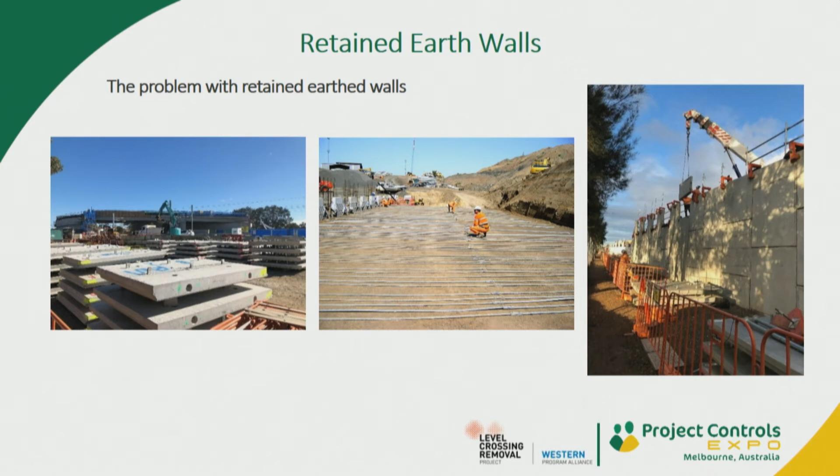You have to run a course of panels. This will all make a lot more sense in a little bit. You run the panels, then the fill and the straps, and work your way up. You can't install panels without straps and fill, and you can't install straps and fill without panels coming in. It's quite a sequential flow.

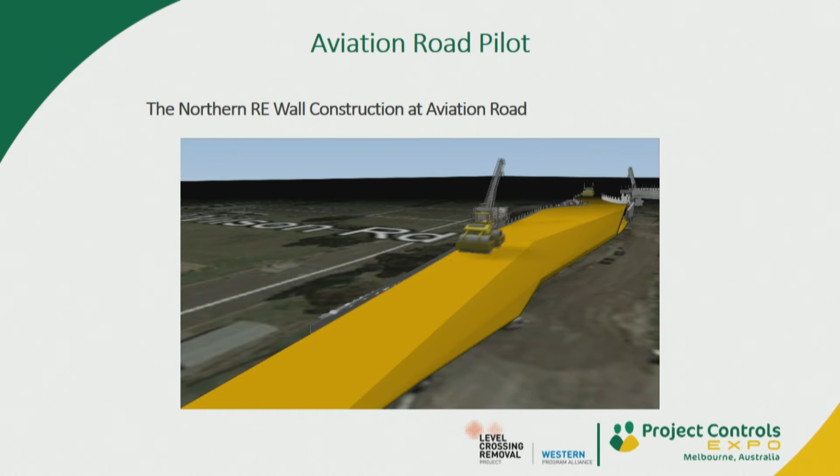This is a 4D animation of the walls that we built at Aviation Road, the trial site. That demonstrates how they go together. It doesn't show the straps.

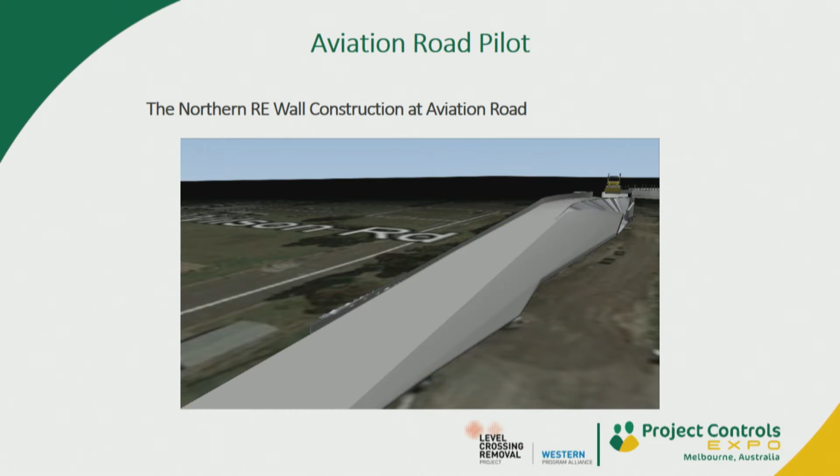That's one of the walls. And I'm handing over.

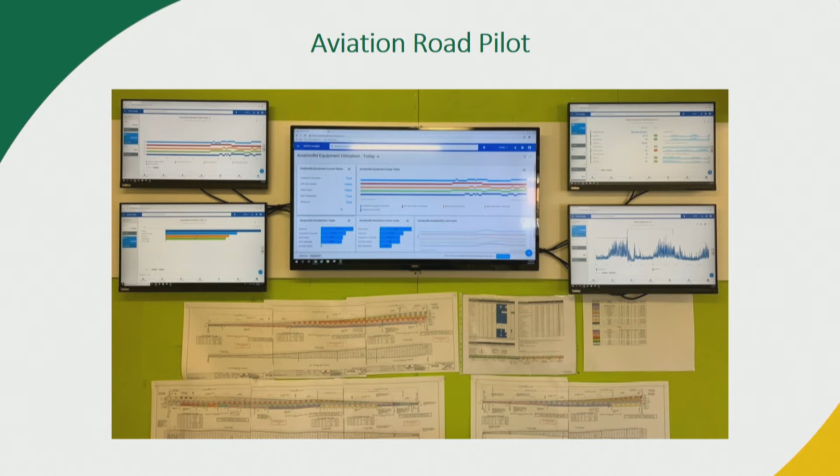So this is actually in the planning area, out on site. This is where they would do their daily stand-ups, as well as usually their weekly construction meetings to discuss what they're doing for the next few days, as well as the next few weeks. So these visuals were put together to allow our people to actually make informed decisions and proactive decisions.

So once we got all this technology up and working, we were able to prove that the concept actually worked, rapidly deployable, that sort of thing. We decided to switch focus. We had about 6 weeks left of the pilot, and then we also had about 6 weeks left of RE wall construction. So we decided to concentrate on that activity.

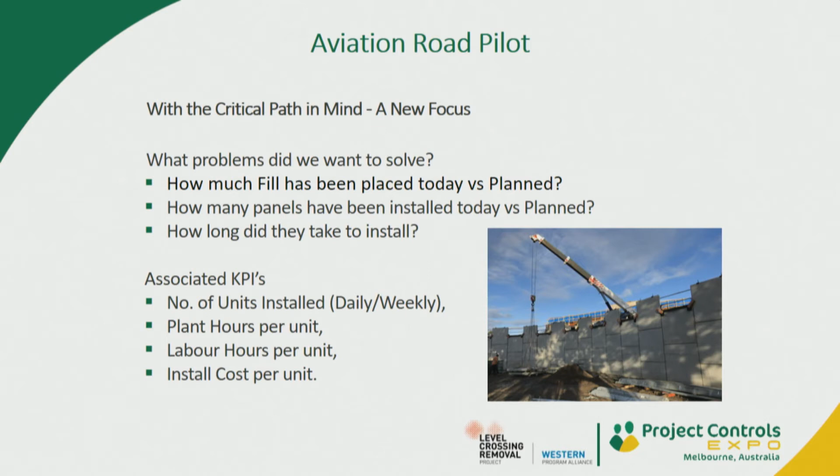So going back to the whole premise of connected sites being user-led, we started with those questions. What did our people need to see in order to make informed decisions? What was the burning platform? So those questions were like, how much fill have I placed for the day compared to what was planned? How many panels have I installed today compared to planned? And then how long did it take for me to install those panels?

So that all goes towards your critical path activity. And if you can influence your critical path, I don't need to tell you the savings involved with that. And additionally to that, LXRP have some pretty key KPIs as part of most activities that we're trying to measure, or part of our continuous improvement as part of the program.

So some of these KPIs can include the number of units we've installed per day as well as per week, the amount of plant that we've used and the hours associated to actually install that, the labour that we've used to install that, and all that goes towards cost.

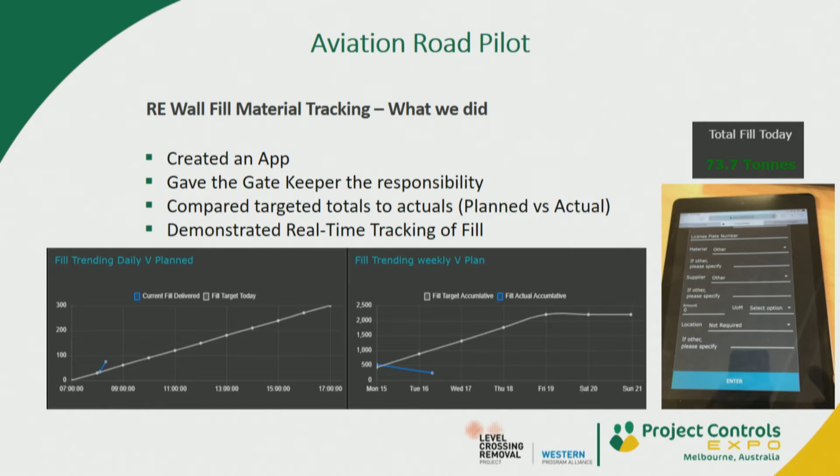So moving on to the fill specifically, what did we do? So keeping in mind we had about 6 weeks to do this, it was all done very quickly, reasonably rough, but it worked. So we developed an app that was able to be used on any browser-enabled device, mobile device or your computer. We then handed out an iPad to each of the gatekeepers out on site, and there were numerous of them. That app allowed them to put in the license plate number of the trucks coming through the gate,

as well as the material that was being brought through, the unit of measure, and how much was being brought through. Additionally to that, the construction team had access to the platform as well to actually input their daily targets. So instantly, we could measure plan versus actual. So we presented that in a visual similar to that one there. This was all done real time as well. So as the guy at the gate was putting in the numbers, it was coming up on the screen.

So instantly, people were able to make proactive decisions, being the operative thing, rather than reactive ones. Because typically, this information wasn't really well known until about a day or two, potentially even weeks later, when someone was actually inputting all the dockets into an Excel spreadsheet, God forbid.

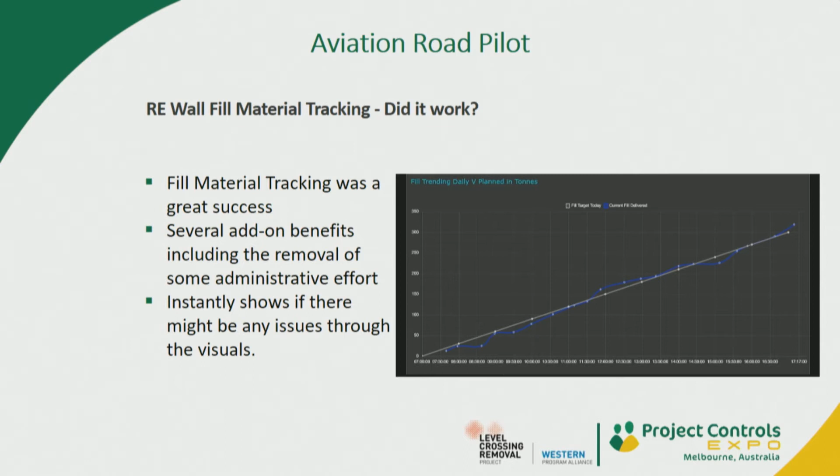So was it successful? Basically it was. It was a great success. We had many additional benefits as well. We removed some administrative effort, being that the information was already being input at the gate, so therefore some administrator didn't actually have to input from the dockets straight into an Excel.

It also gave a great indication of productivity. So obviously the amount of dirt that's coming through, if it's been placed directly, it goes towards your productivity. It also, stressing the point, allowed the users or the guys out on site to make proactive decisions, giving them the presentation of data to allow them to make those decisions.

Moving on to the more exciting one, the panel tracking. The theory was pretty simple. We had a few GPS devices. We were going to put two on the crane, one on the boom, one on the body. And then we also had the GPS locations of the wall, each panel individually, because we built them in CAD first, so we had each of those.

Simply, if we would overlay the two, if the crane was sitting over the top of the wall for more than a couple of seconds, you could assume that that's a panel install. So you've got instantly, well, not what panel, but you've got a panel has been installed, as well as how long it's taken you to install them.

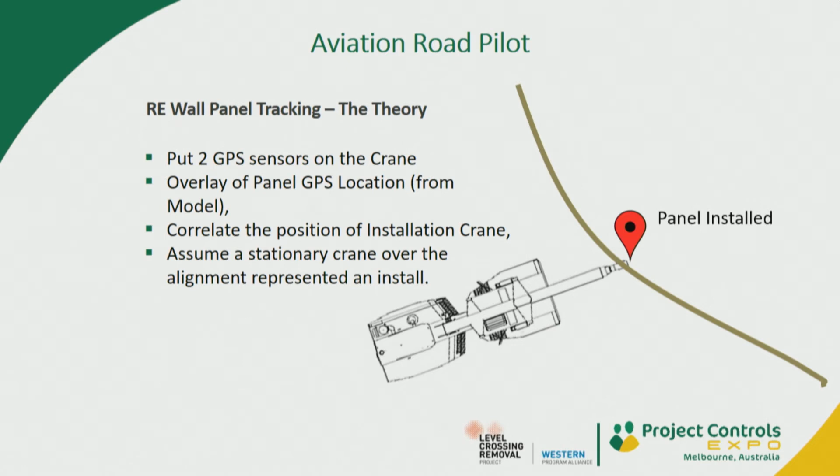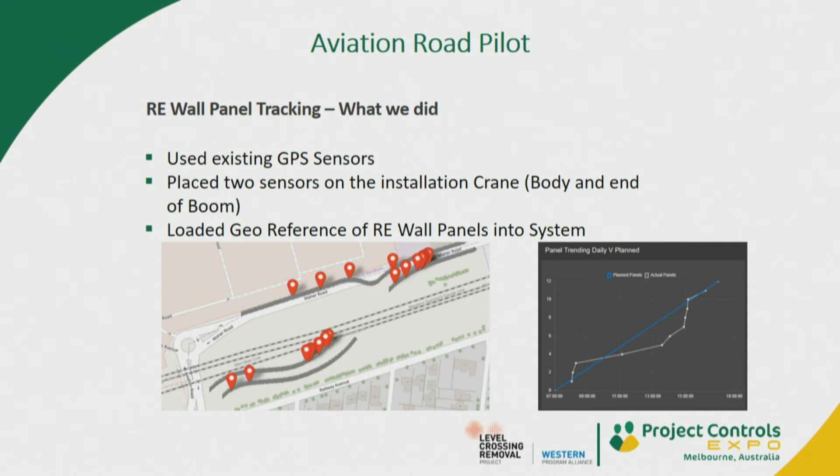So we did exactly that. We put two GPS sensors that we already had out on site. They were just magnetised units, so we just lifted and shifted. We put them on the crane. We extracted all the GPS locations of each of the panels and imported them directly into the platform. And then we got several weeks' worth of data.

So did it work? Before I answer that, I think I should stress that a point of a pilot is to actually fail, as long as you learn from those mistakes. So the simple answer is it didn't work. We failed probably miserably, looking back. But some of the key problems that we had was the GPS scatter that we had on the crane. The scatter was probably about as wide as the MCG. So when you're talking about a panel that's 2 metres wide, you've got Buckley's chance of actually measuring that.

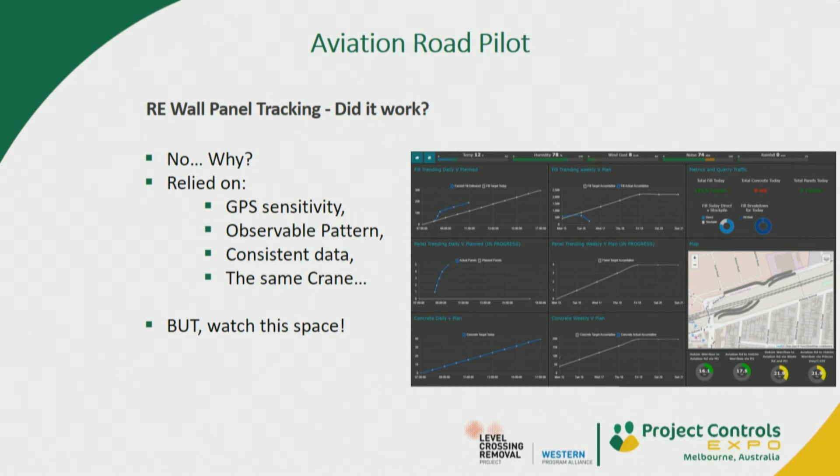So we tightened that up, made the scatter quite tight, as well as increased the interval of the data packets from 1 minute to 15 seconds, hoping that would give us a little bit more accuracy, which it did.

As part of that, we found another activity that was confusing things greatly. As well as installing panels, we were also shifting metal straps from one side of the wall to the other. When you're looking at purely just the data from an analyst's point of view, the two activities look the same. For anything to be identified as a discernible pattern, you need consistent data.

That brings me to my favourite problem. We actually had a guy out on site watching these cranes, observing them, tagging when a panel was being lifted, when it was being placed, when the crane was moving away. All went really well. The only problem was, by the end of the day, we figured out that the crane that we were using was being wet hired, and it was actually down in Geelong. So it was a problem that we came across more than a few times.

Having said all of that, we learnt a great deal as part of this, and it is going into some interesting places moving forward. It's proven itself to be of great value. And just to talk to some of that really exciting stuff coming up, I'll pass it back over to Phil.

Thank you. Sorry, Rhys, can you unlock this? Thank you.

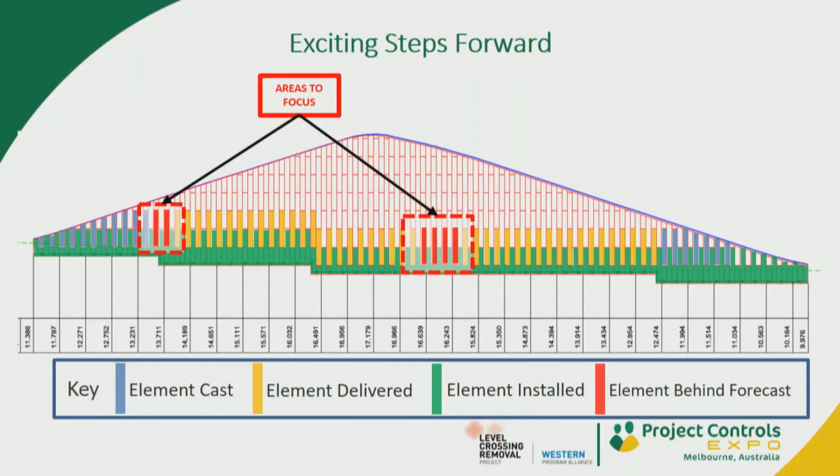And we're also thinking about the visuals, and we've done a lot of work with the people out on site who have to deliver this, saying what is it that you want to see. So we're really designing user interfaces for each of the people, and also the people off site in the production. So our problem before is we've now got some visibility. And this is what visibility looks like at the moment, and it's probably going to get even better going forward.